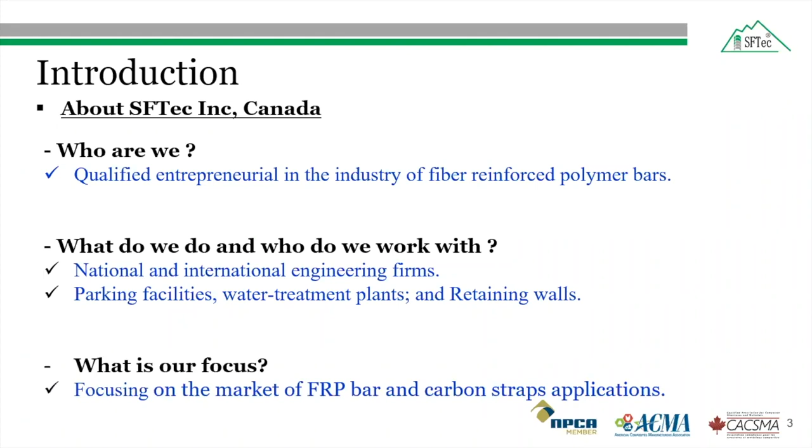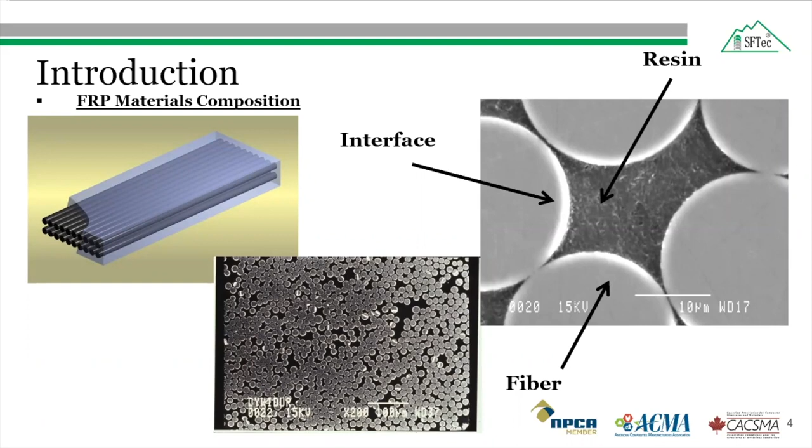The SFTec FRP bar is made of composite materials, either fiberglass or carbon fiber. It is manufactured by a process called pultrusion using a mix of recycled fiber and resins. This figure shows a microscopic view of the FRP bar.

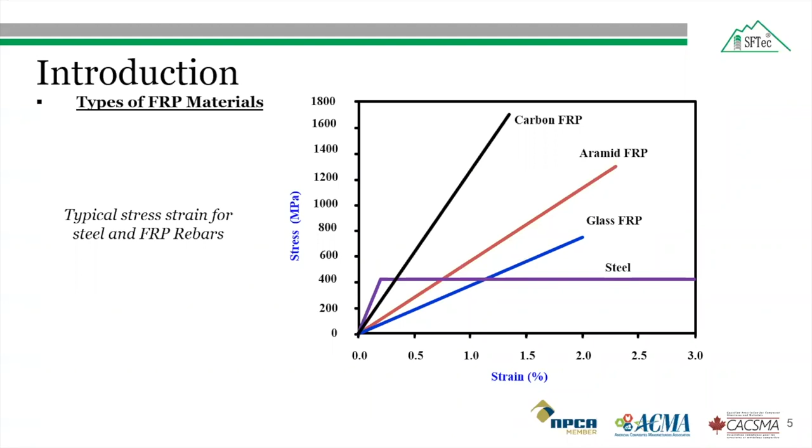In our products, we have different types of FRP products depending on the project requirement. Some of the FRP bars we produce are straight bars, spiral and stirrups for transverse reinforcement, bent bars, and glass fiber reinforced polymer shear connectors, which is the topic of today's talk.

The glass fiber reinforced polymer bar is widely used due to its production cost and better tensile strain compared to the other fiber reinforced polymer bars. That's why most of our products are made from glass fibers.

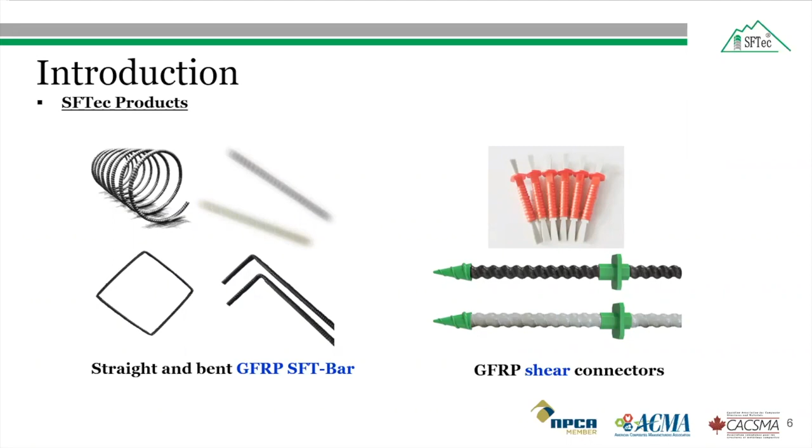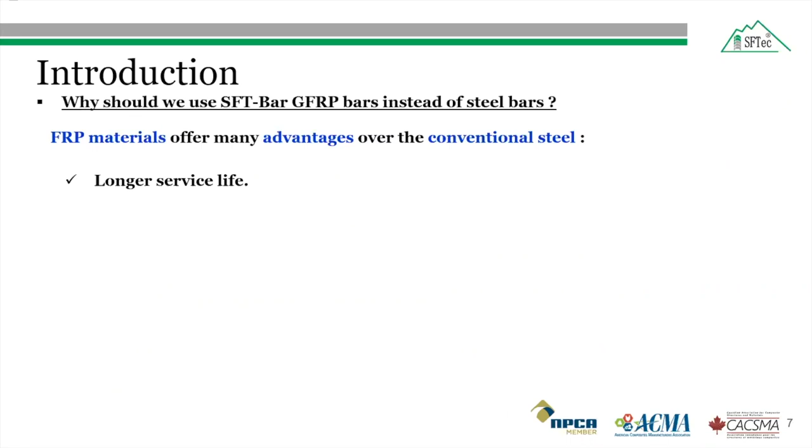Some of the advantages of the SFTec glass fiber bar over conventional steel bars are: it has a longer service life because of its corrosion resistance and therefore improved durability in harsh marine environments, such as construction near coastal areas in North America's cold climate.

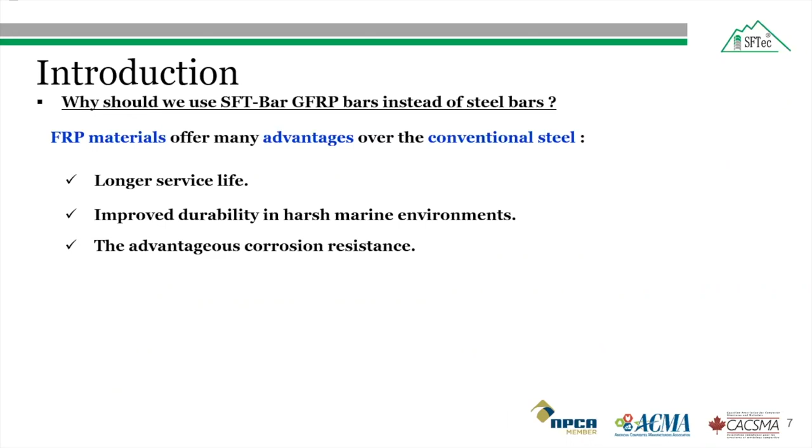The FRP bars have better resistance against corrosion compared to steel bars. The tensile strength of the FRP bars is 2 to 3 times more than that of steel bar. FRP bars are also lighter due to the low density compared to steel bar.

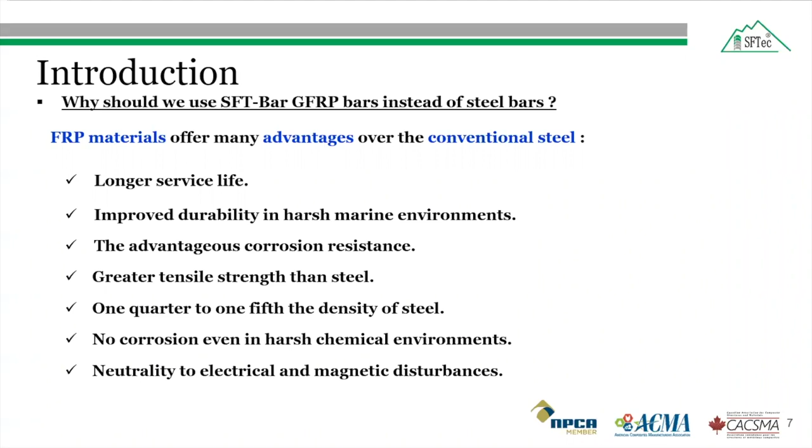Due to the corrosion resistance, FRP bars are good for harsh chemical environments as well. They are neutral to electrical and magnetic disturbances, making them useful for applications such as airports, military applications, MRI rooms, and hospitals.

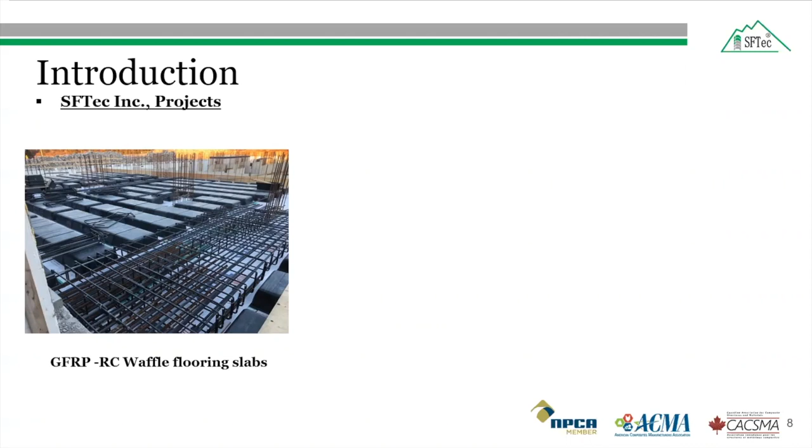It can also be used for slab on grade. It is a non-structural slab and is not a one-to-one replacement, but it saves a lot of money compared to steel bar in terms of labor and transportation.

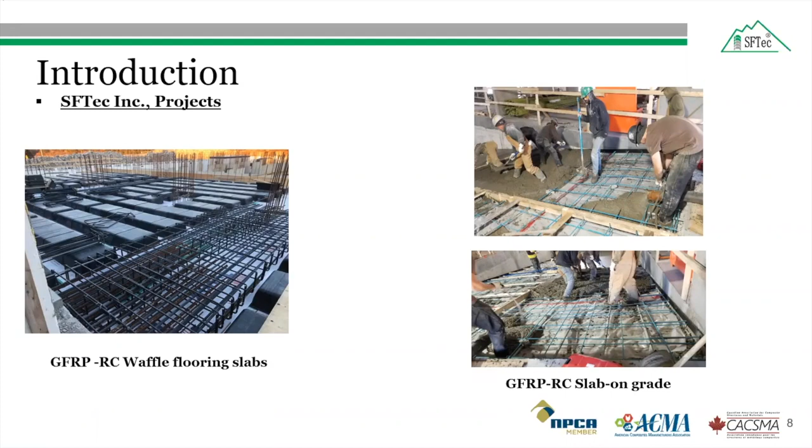Another project shows cast in situ precast sandwich panels, where they used our glass fiber reinforced polymer bars as reinforcement. This was built in China.

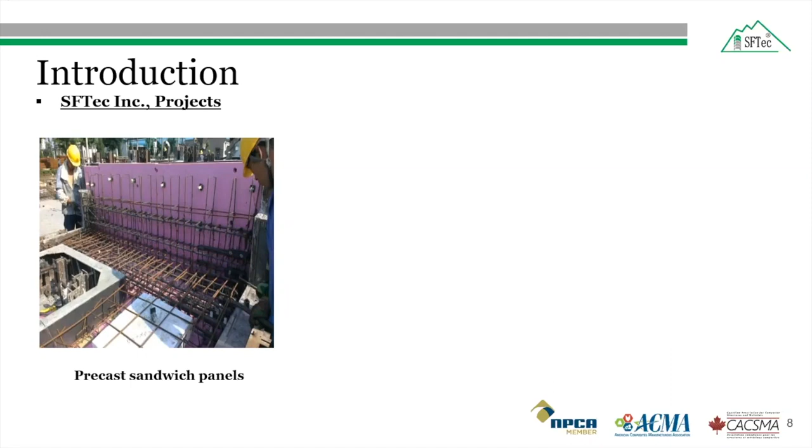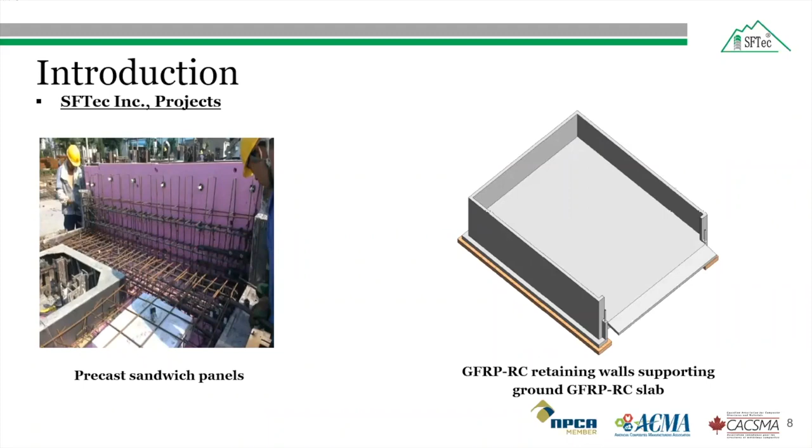On the right is a retaining wall built for the city of Montreal. The retaining wall is designed to hold snow with de-icing salts during the winter, so they built this retaining wall with SFTec glass fiber reinforced polymer bar, which provided resistance against the chemicals used in the de-icing salts.

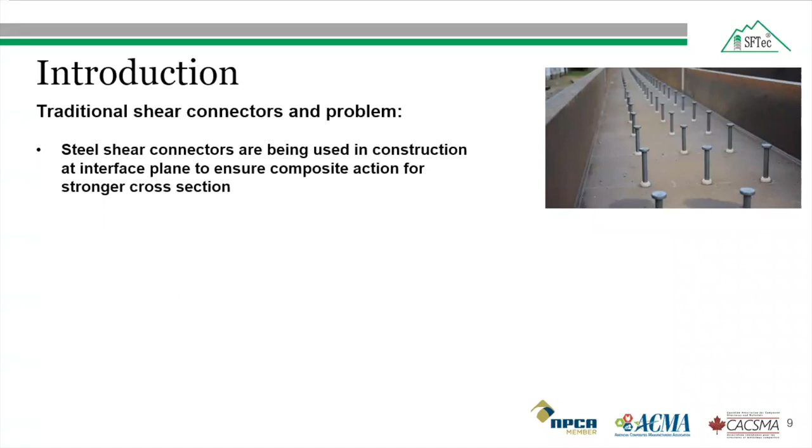Traditional steel shear connectors, also called studs, are used in bridge construction at the interface plane between the cast in place deck slab and the precast girder, to ensure composite action for a stronger cross section. But as we know, in North American countries the bridge deck slab corrodes over time due to environmental conditions.

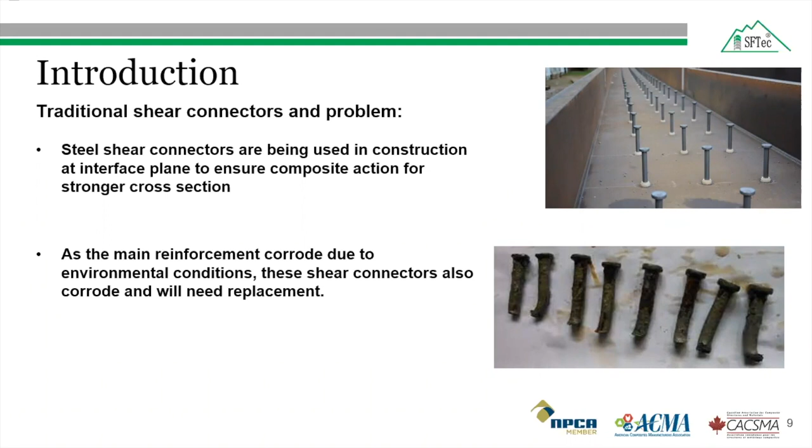These shear connectors also corrode and will need replacement, especially in Canadian winters where de-icing salt is used. The corrosion of these steel shear connectors results in gradual loss of the composite behavior and strength of the composite action. So fiber reinforced polymer connectors have shown to be an effective alternative to conventional steel connectors due to their resistance against corrosion.

FRP connectors are lightweight and also non-conductive and magnetic free. We'll discuss why the non-conductivity of the FRP is helpful.

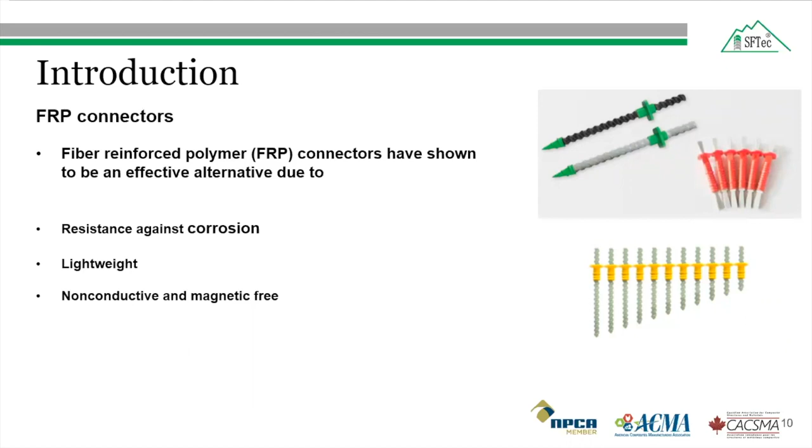With SFTec connectors, we have generally 3 different types. The type 1 connector is the SFTec thread connector, which has a tensile strength of 700 megapascal, 180 megapascal shear strength, and tensile modulus of 65 gigapascal.

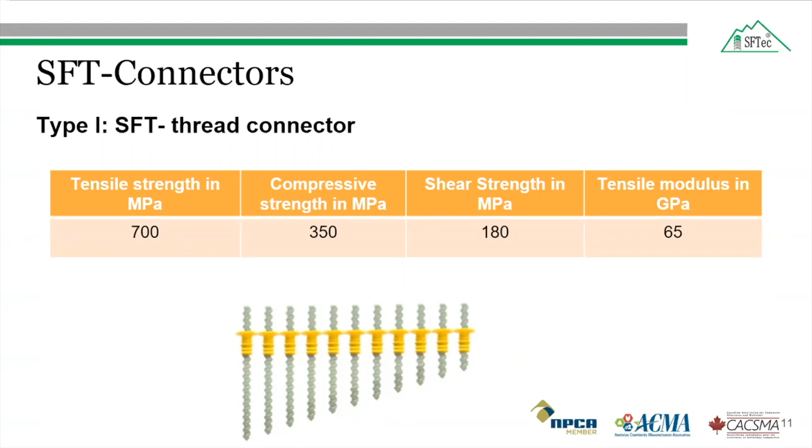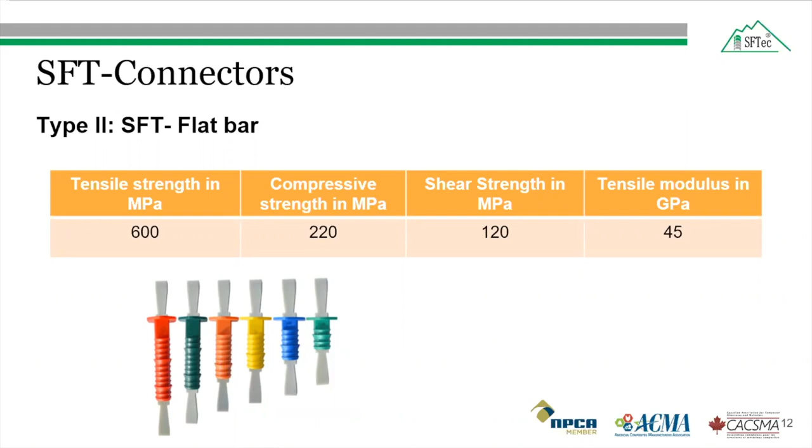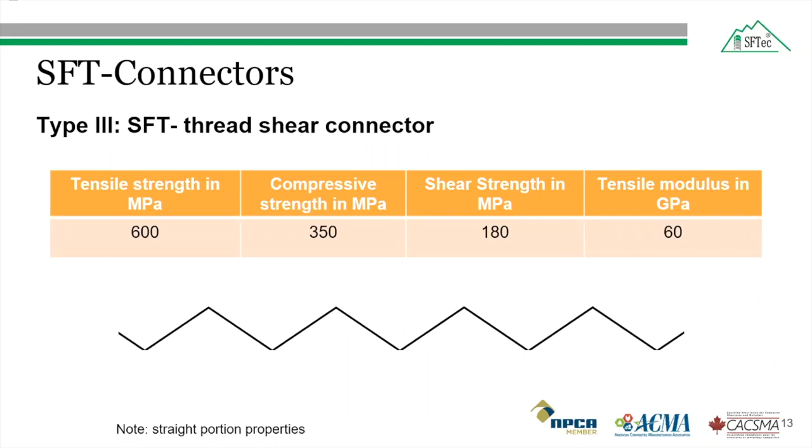Finally, the third type is the SFTec thread shear connector, which has a tensile strength of 600 megapascal and tensile modulus of 60 gigapascal. Its structure is like a truss. It is worth mentioning that all SFTec connectors are made up of fiberglass.

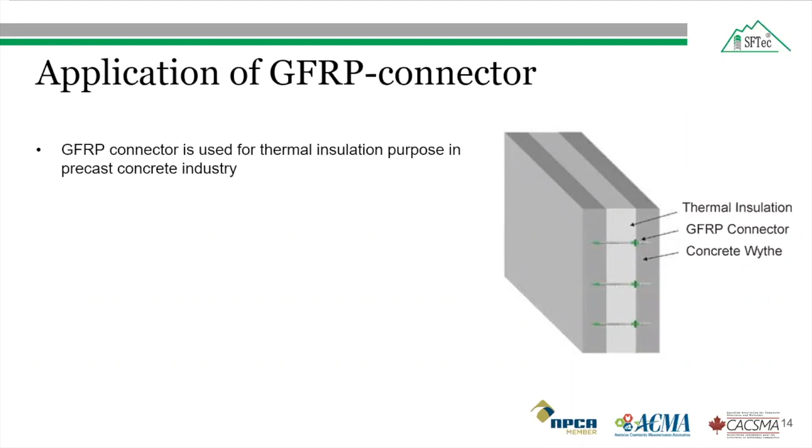The GFRP connectors are used for thermal insulation purposes in the precast concrete industry, such as plant precast and cast in place projects. The precast concrete sandwich wall is composed of an inside layer, outside layer, and thermal insulation, which is generally between the 2 concrete wythes.

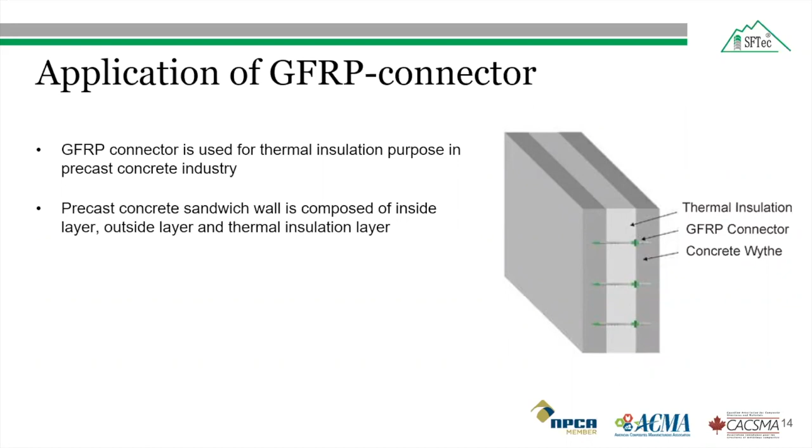The FRP thermal insulation connectors are used to connect these 3 layers, and they not only bear the weight of the insulation and outside layer, but can also bear wind load, earthquake load, and other kinds of loads.

There are two cases presented today: one dealt with the thermal resistance of the GFRP connectors, and the other with the shear capacity.

The first case study is about the experimental investigation of thermal properties of insulated concrete sandwich panels with fiberglass shear connectors. Increasing economic and environmental costs of space heating and cooling have generated renewed interest in improving the thermal resistance of building envelopes.

At the same time, rising construction costs are driving designers to select prefabricated elements which can be constructed with higher quality control and in less time than traditional construction. Precast concrete sandwich panels, also known as insulated concrete walls, are thermally efficient prefabricated elements that can address both of these needs.

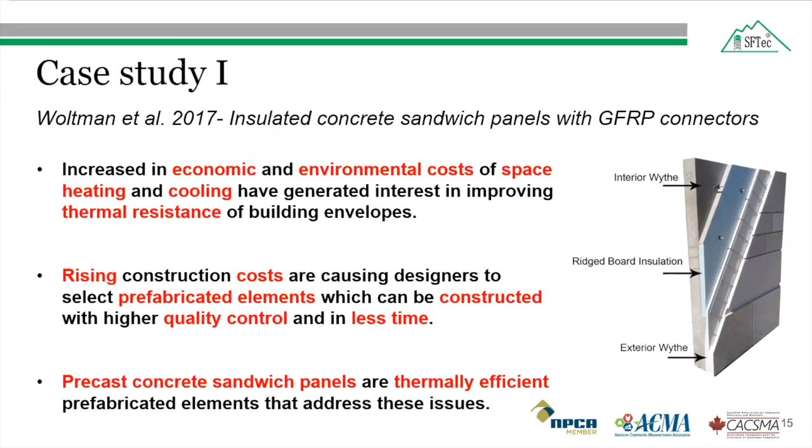Steel connectors are widely used in the industry, but also have the highest thermal conductivity of the connector materials available. Concrete is also used to connect the wythes in full composite panels; however, a large area of concrete is required, which creates a large thermal bridge.

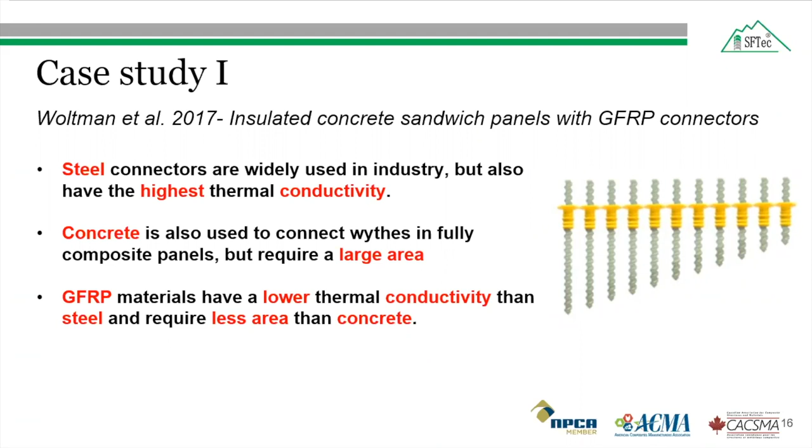Over the past two decades, rising energy prices have encouraged the development of alternatives to traditional steel reinforced design. Glass fiber reinforced polymer, or fiberglass, materials have significantly lower thermal conductivity than steel, generally ranging from 1/60th to 1/30th that of steel, and require less bearing area than concrete to hold the two wythes together. In case study 1, the test setup was a hot box apparatus used to determine the thermal behavior of the insulated concrete sandwich panel.

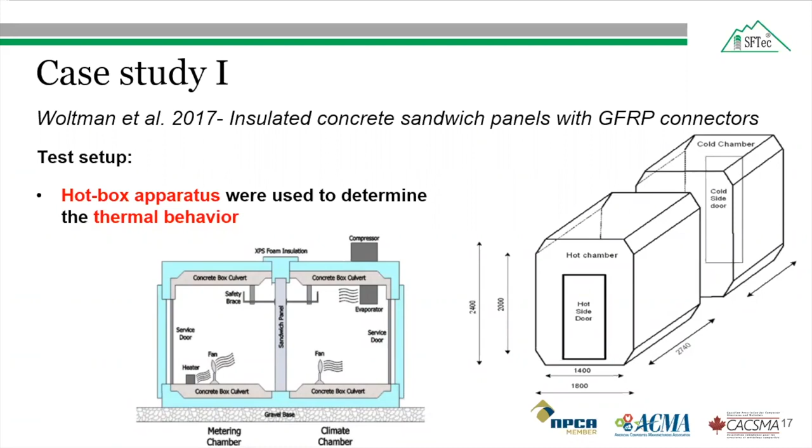The back of each chamber in the hot box apparatus was left open to allow the test panel to be installed. This figure shows how the test panels were installed inside the hot box.

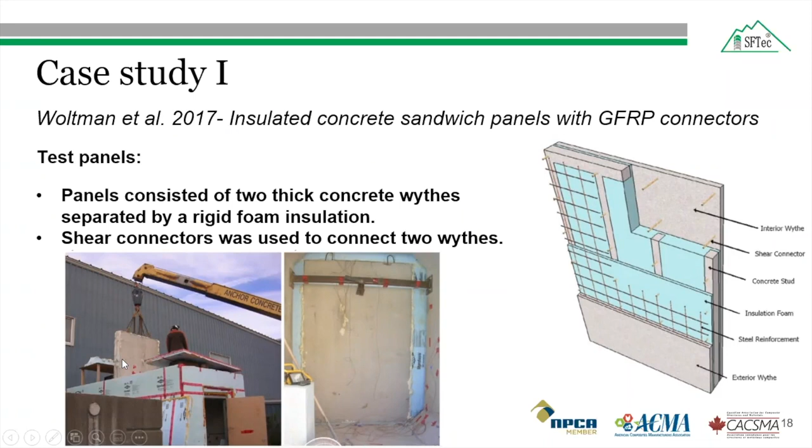The thermal resistance, or R value, is the ability of the insulation material to resist heat flow. The R value of each specimen, in square meter Kelvin per watt, can be determined from the average surface temperatures of the hot and cold sides of the panels and the amount of heat received from the metering or hot chamber.

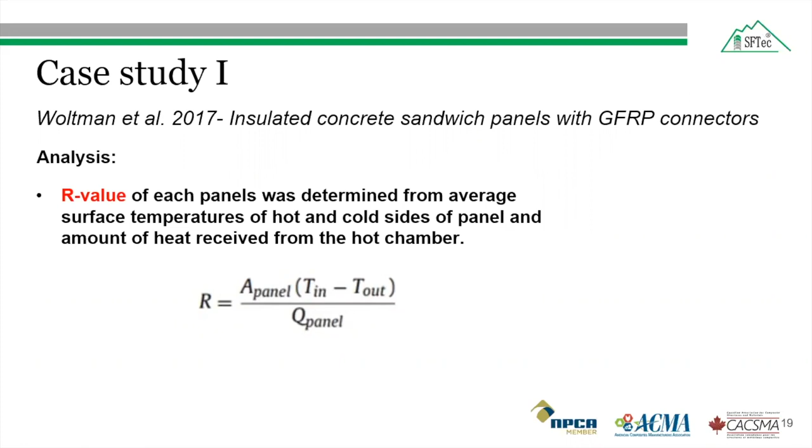In this equation, A panel is the area of the test panel, T in and T out are the surface temperatures facing the hot and cold chambers, and Q panel is the heat received by the tested wall.

Now coming to the results from case study 1, the two panels were constructed with similar numbers and dimensions of shear connectors. One was reinforced with a steel connector, the other with GFRP connectors.

The GFRP connector panels, or fiberglass shear connector panels, were found to provide equivalent or better thermal resistance than the counterpart steel connector panels, due to the lower thermal conductivity of the glass fiber reinforced polymer compared to steel, which minimized the effect of thermal bridging.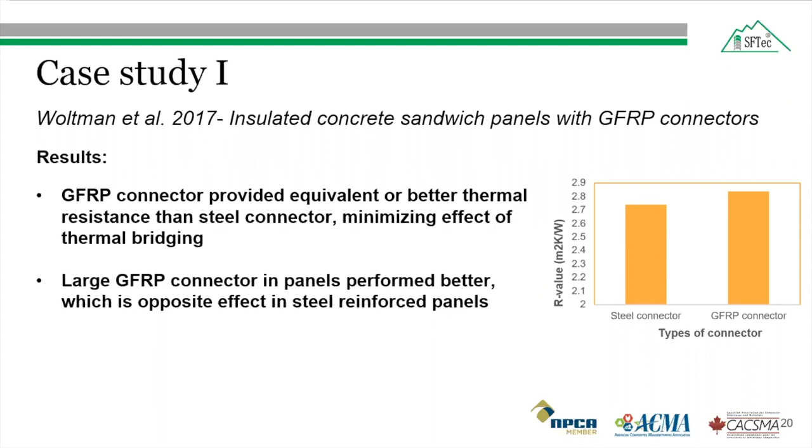The other conclusion drawn from this study was the large glass fiber reinforced polymer connector panel resulted in a 60% increase in thermal resistance compared to the control panel, which is the steel panel reinforced with steel connectors. This result is the opposite effect of what we expected for steel reinforced panels, as the increased connector area of steel would lead to more thermal bridging because steel has very good conductivity.

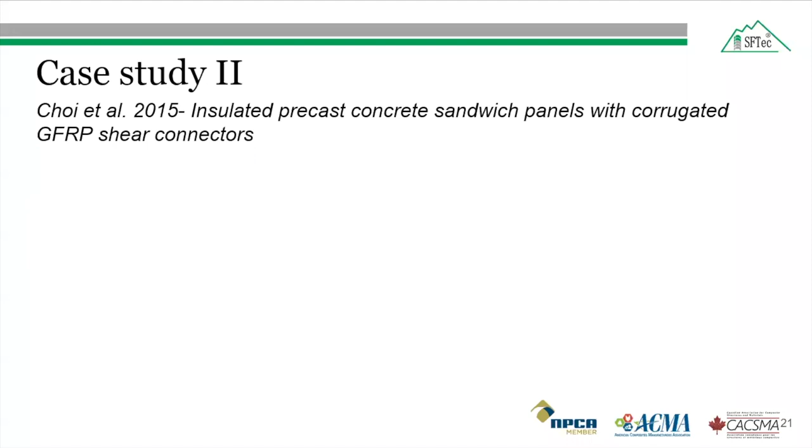Now the second case study talks about the in-plane shear behavior of insulated precast concrete sandwich panels reinforced with corrugated GFRP connectors. As mentioned earlier, insulated precast concrete sandwich panel systems are widely used commercially due to their economic advantages and superior thermal and structural efficiency.

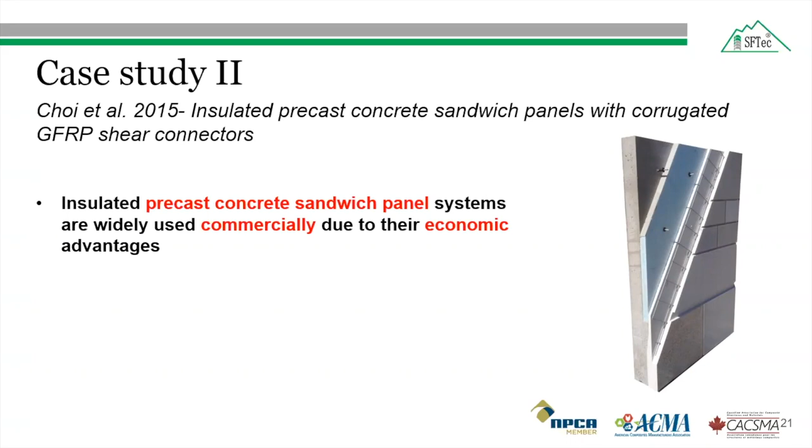As discussed, the panel consists of exterior and interior precast concrete panels separated by a layer of rigid foam insulation. The presence of the insulating layer enhances the thermal efficiency of the precast concrete sandwich panel system. The two discrete thin concrete wythes help resist applied load by changing the shear transfer mechanism of a conventional concrete wall panel. The figure shows the glass fiber reinforced polymer shear connector that incorporates a 45-degree angle to the shear plane and is 5 millimeters thick.

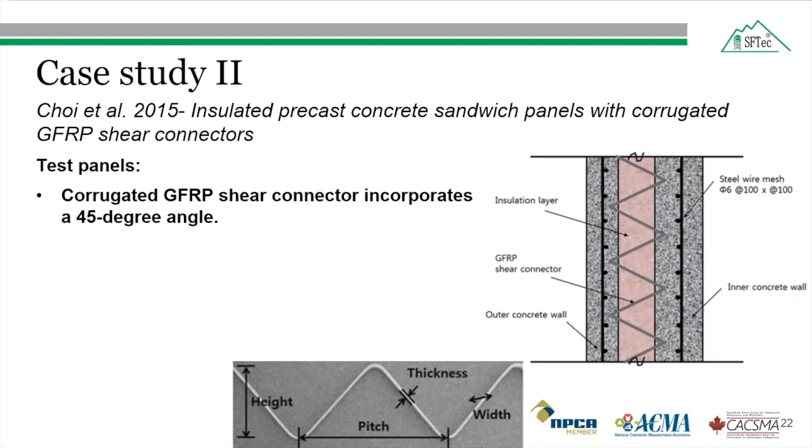A variable of the GFRP connector was used to investigate the toughness of the glass fiber reinforced polymer shear connector, varying its pitch, height, and width. The specimens were supported vertically at the bottom edges of the two concrete outer wythes on steel blocks. A displacement rate of 5 millimeters per minute was used for the specimen. A vertical load was applied through the load cell and steel block in line with a 1000 kilonewton hydraulic jack to the top surface of the inner concrete wythe to produce direct shear force across the interfaces.

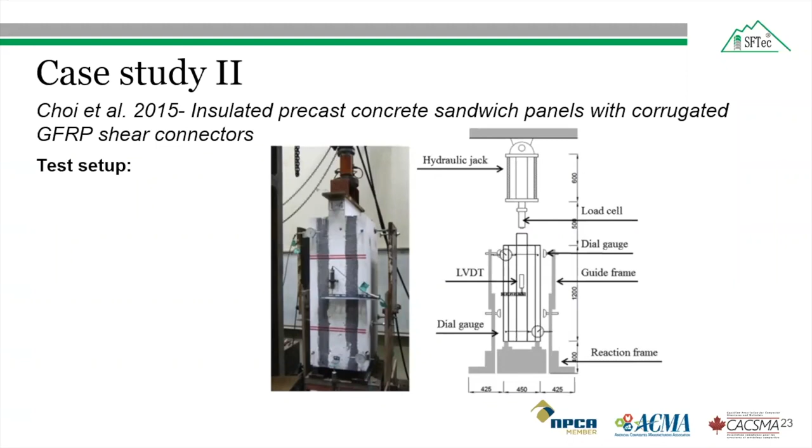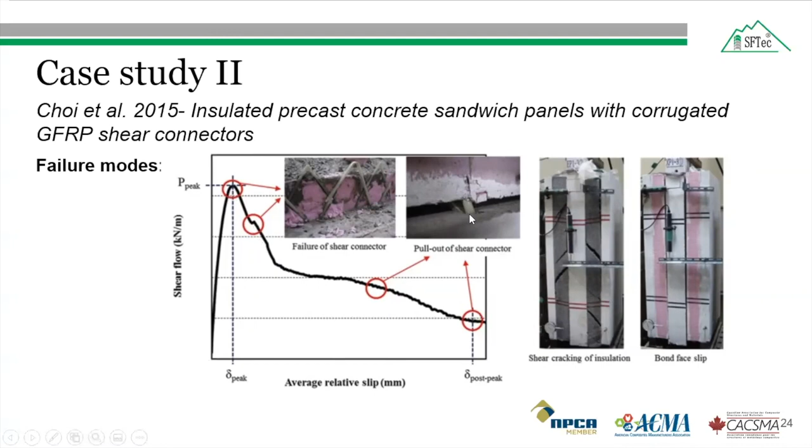The failure mode after the test showed that the strength of the panel reduced after maximum loading, followed by failure of the shear connector, and shear cracks in the insulation and delamination of the concrete and insulation were observed. As the rate of displacement increased, the load gradually decreased. The specimen failed with the pullout of the shear connectors when the embedded length was not long enough.

The results drawn from case study 2 were that a variable of the GFRP connector was used to investigate the toughness of the GFRP shear connector, specifically its pitch and width. An increase in the width of the corrugated GFRP shear connectors tends to increase the stiffness and strength of the specimen, and with an increase in the pitch, the in-plane shear strength increases, resulting in higher tensile strength of the shear connectors.

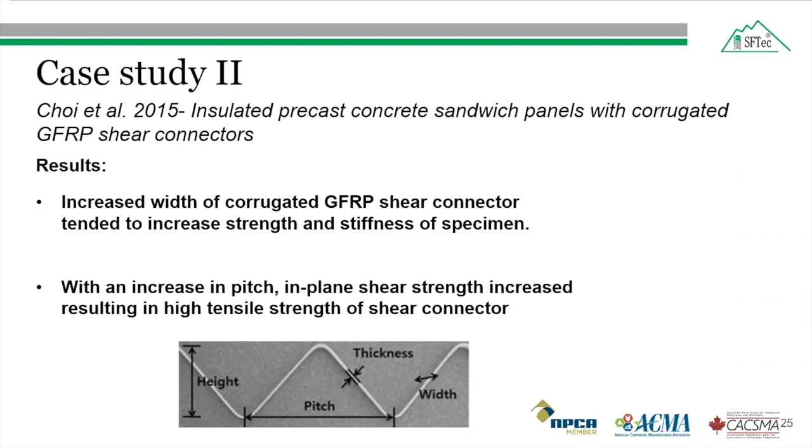So from these two case studies, we found that in the first case study, the thermal resistance of the GFRP connectors is better than the steel counterpart connectors. The GFRP connectors, even with an increased or larger size, provide better thermal resistance compared to steel connectors. And in the second, the shear strength results of the GFRP connectors provide better insight into how much pitch, width, and height of the GFRP connector should be used in the precast sandwich wall so that it can provide sufficient shear strength.

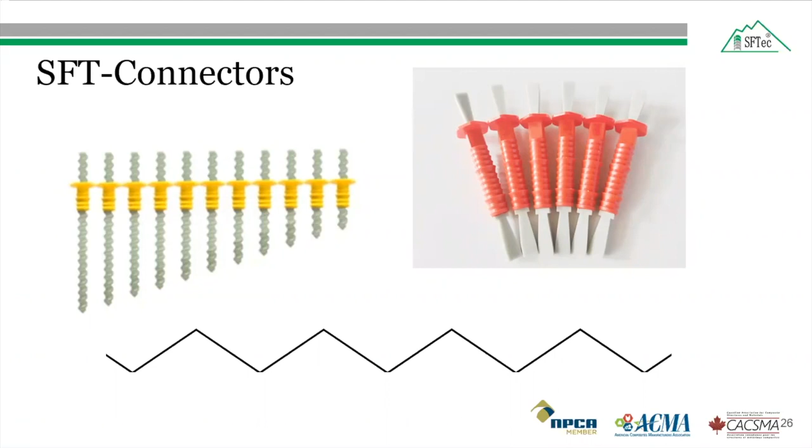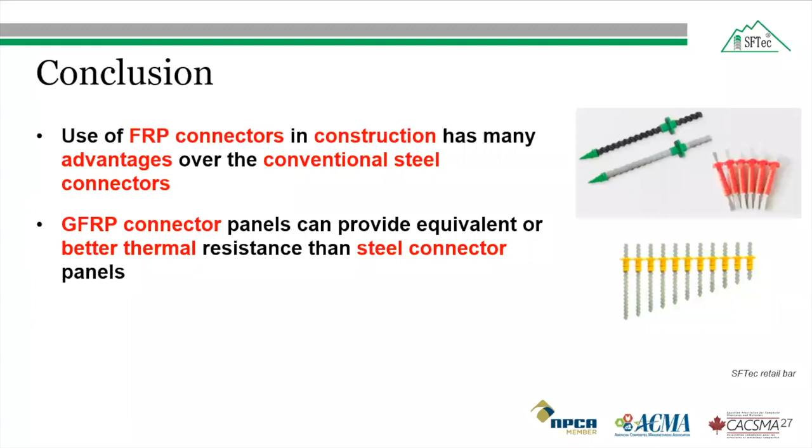So in conclusion, due to the corrosion resistance, lightweight, and magnetic-free nature of FRP connectors, they can be used in construction, replacing conventional steel connectors. GFRP connectors in precast insulated sandwich panels can provide equivalent or better thermal resistance than steel connector panels due to the low thermal conductivity of GFRP compared to steel.

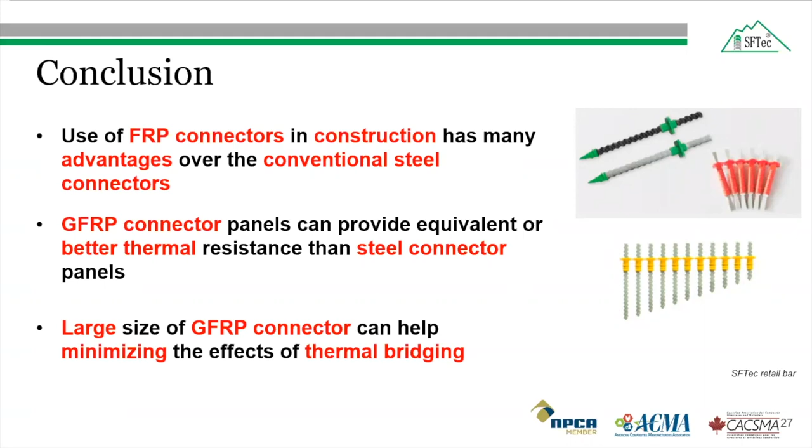And finally, the large size of GFRP connectors in precast insulated panels provides better thermal resistance, which is the opposite effect of what would be expected from steel connectors, as increased steel connector area would lead to more thermal bridging. Thank you very much for your kind attention.